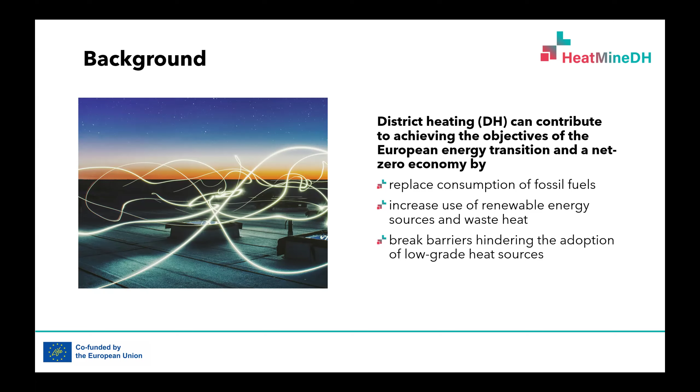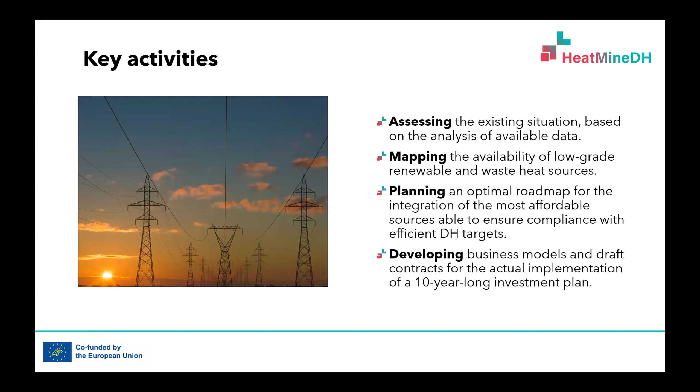Through HeatMineDH, we look at the mapping, we look at the assessment. As you can see here, we help plan, but you also need to finance it. And this is where we come in, and we want to develop business models and draft contracts for actual implementation of these resources. We're going to look a little bit more about that later on today. We develop business cases and support district energy utilities and municipalities in achieving their energy efficiency targets. But that's enough about us.

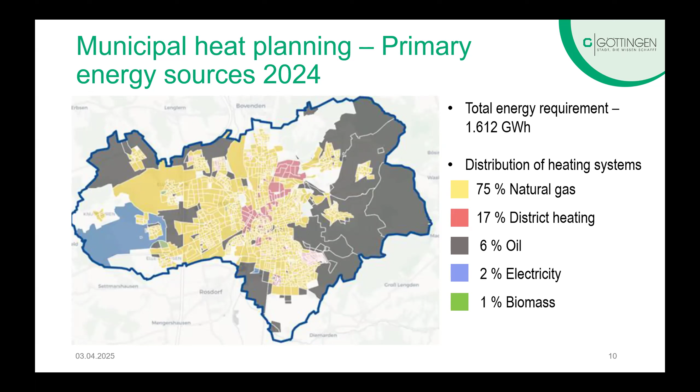Yes, it's called the district Mittelberg. We have 3,100 inhabitants and about 1,770 households. And it has about 60% private ownership, which is important due to success of implementation of heat transition.

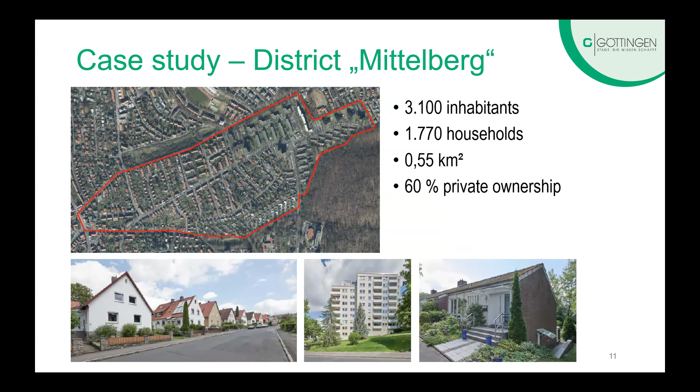On the next slide, you can see the status quo of energy efficiency in the district Mittelberg, which shows a precisely recorded renovation status, and the optimization of efficiency was determined for the cover of the buildings and the heating technology. So we found out that most of the buildings have not been fully renovated, and the renovation potential is very high, especially in single family buildings the owners live in themselves. In the left lower part of the map, you can see it in the orange color.

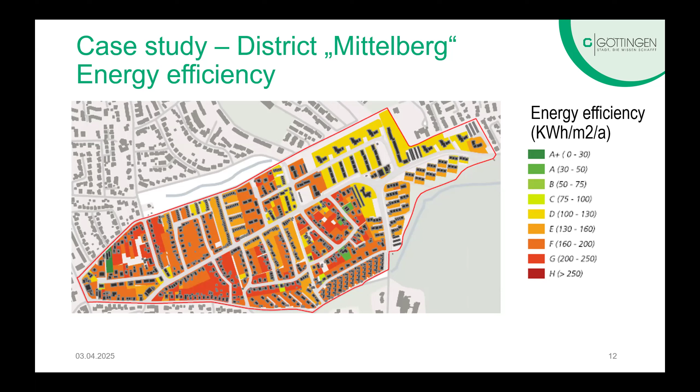So the next slide shows the renovation. No, one back, please. Thank you. Shows the possible energy efficiency after renovation due to regulations. And this is one of the barriers. It is very expensive for the owners to renovate their homes. And the energy demand remains at average 100 to 130 kilowatt hours per square meter and year.

And furthermore, it is expected that owners will not fully renovate their homes due to financial reasons. And the municipal administration has very little impact on the rate of the renovation. So it can only create incentives as the Göttinger Klimafonds or Climate Fund.

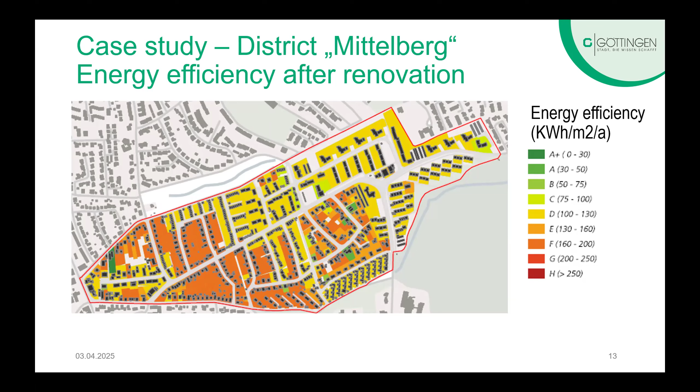So on the next slide, the case study showed that it would be feasible to build heating networks in the blue and green zones because the density of heat lines is very high there. And the problem is forecasting future heat demand. It is very difficult here as it determines the temperature at which the network must operate when it's implemented.

A high temperature network is different from a cold district heating network. Both require significant investment from energy suppliers to convert energy sources for heat supply and expand the networks. This leads to excessive demands and high energy prices for customers. So the idea is to develop an instrument that spreads the burden across multiple shoulders, as shown on the next slide.

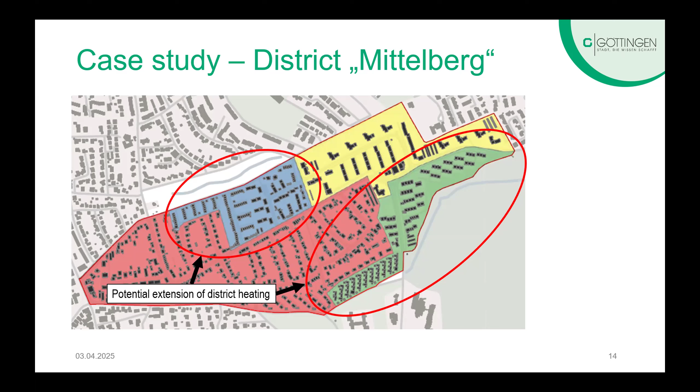Thank you. We've called it Göttingen Energy Region. We have 4 regional stakeholders and 2 of them are energy suppliers that want to approach investments in renewable energies as project companies. And what is important is to emphasize here that local stakeholders, such as cooperatives, can participate in this network. This can be viewed as an investment opportunity or as direct marketing for them.

From a strategic perspective, altogether, the advantage of a local heating network would be that a cold local heating network can also be used for cooling, which will be important in the future and will address the reservations private individuals have about centrally supplied district heating. Though the prices for heat consumption will definitely be more expensive than gas-fired heating, at least for the time, which influences most people's investment decisions.

By offering a heating network, we make it easier for property owners to choose climate neutral heat. This is the approach. However, this only applies to owner-occupied properties. Landlords generally have no financial interest in converting their heat supply, as they derive no benefit from the investment and cannot pass this on to their tenants.

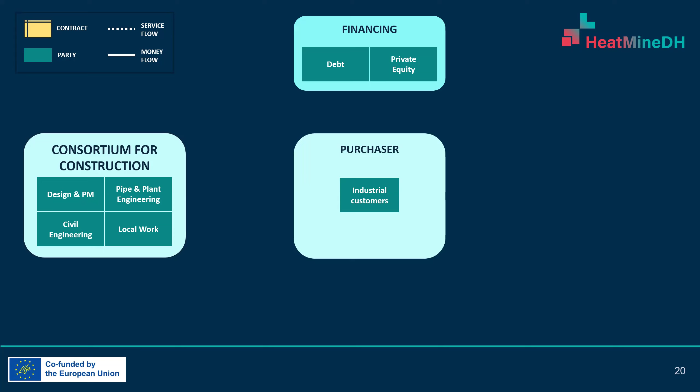Now we see such a cash and service flow diagram. The dotted lines are the service flow, and the solid lines stand for the money flow. In the middle, there is the purchaser, the district heating company, which, linking to Nadine's presentation, might be a special purpose vehicle like the energy service company. In earlier times, this purchaser asked a consortium for construction, of course needing financing solutions. They borrowed the money, paid the consortium, got the construction service, then the plant is in operation, revenues go back to the debt financing, and maybe additional revenues are generated by CO2 trading. This was the EPC model.

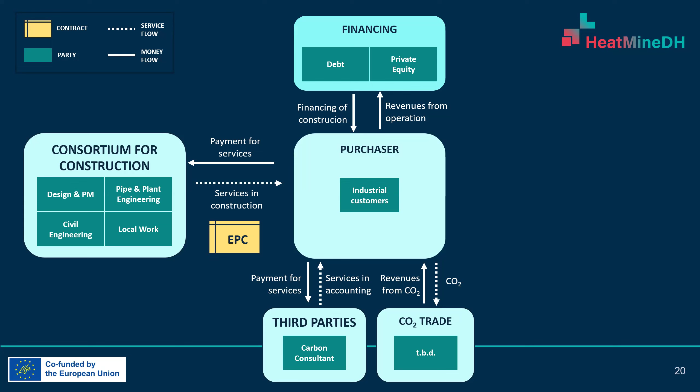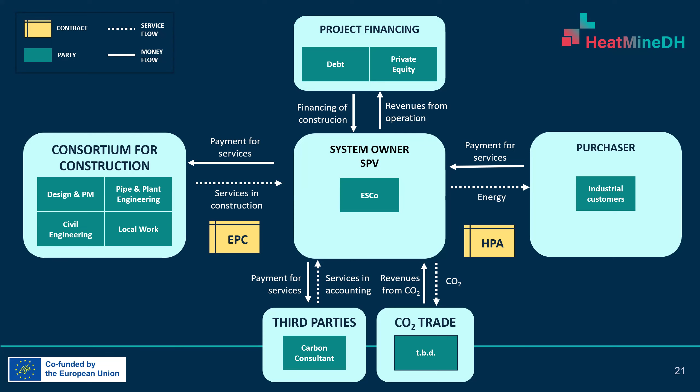Just to say a couple of words on this HPA: of course, the boundary conditions are defined, the tariffs are defined. It's a very crucial document for both parties, and especially when you look at district heating companies, they are mainly publicly owned. There might be the issue of debt equity ratio. So via such a solution, you can have a better financial power for investing in such assets.

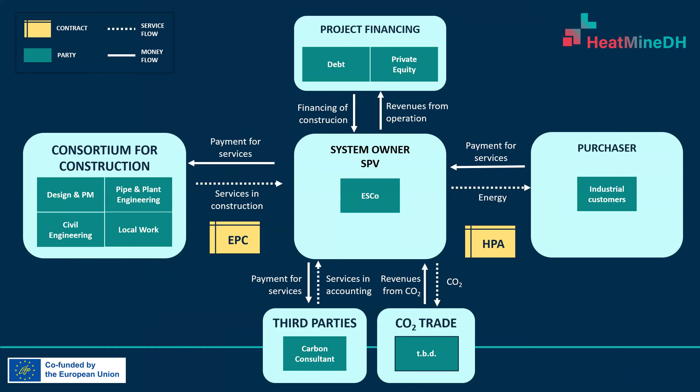This is the big picture, and to sum up again, it's beneficial regarding the operational and financial risks for the district heating company if a special purpose vehicle is offering a heat purchase agreement, with the result that the district heating company can directly get its renewable energy share raised and is on the path of decarbonization. This is the summary slide from my side. So Adrian will now compare the EPC with the HPA business models directly, please.

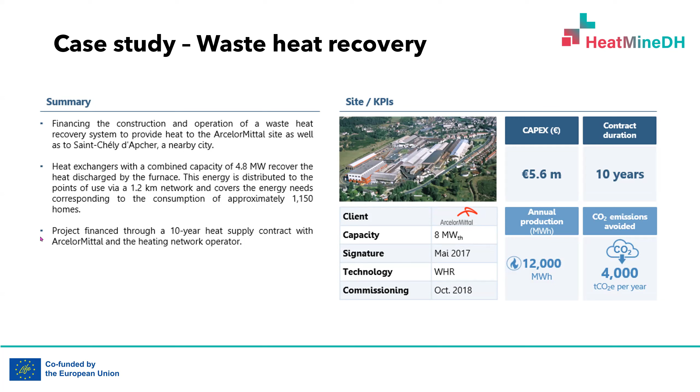Next slide, please. So yeah, that was basically the scheme. So EPC and operation and maintenance with Schneider. We got grants from ADEME and the region Occitanie. Insurance. We made the whole contract, and we only offered a heat supply agreement to the district heating, which was operated by Scape in this small town of Saint-Chély-d'Apcher in the south of France.

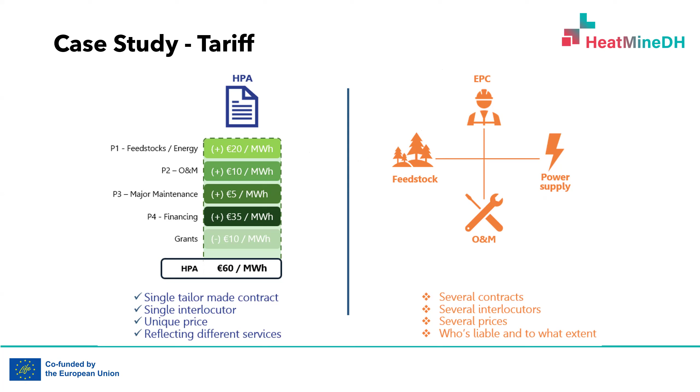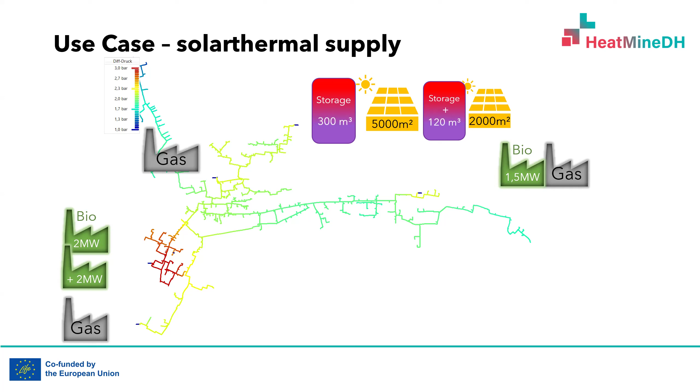Well, that happens a lot of times in Austria. So this city, Mürzzuschlag, was looking for more renewable energy sources, and we implemented in 2 stages solar thermal plus storage capacities, taking in consideration that all the district heating network is supplied well, with a high quality in terms of temperature, and this solution is operated via heat as a service. There is one special purpose vehicle that is offering the energy to the district heating network. And this is how it looks.

And having this tangible idea of solutions, I want to close the presentation with an overview of all the Heat Mine district heating partners, coordinator Eurac Research. Marco Cozzini is the leader and in this discussion online.